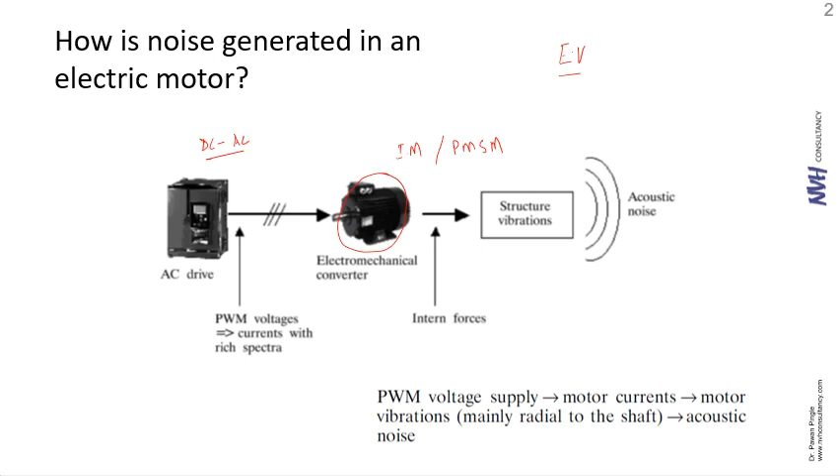Once the signal is converted to AC, it can be fed to the motor to drive it, and the motor will then drive all the components of your vehicle. Those will definitely have some kind of vibrations - these are called structural vibrations, which will then be converted to noise depending on their frequency. Also, there will be some frictional forces coming from the ground, like suspension and so on. So these are different types of noise that could be generated from a motor in case of EVs.

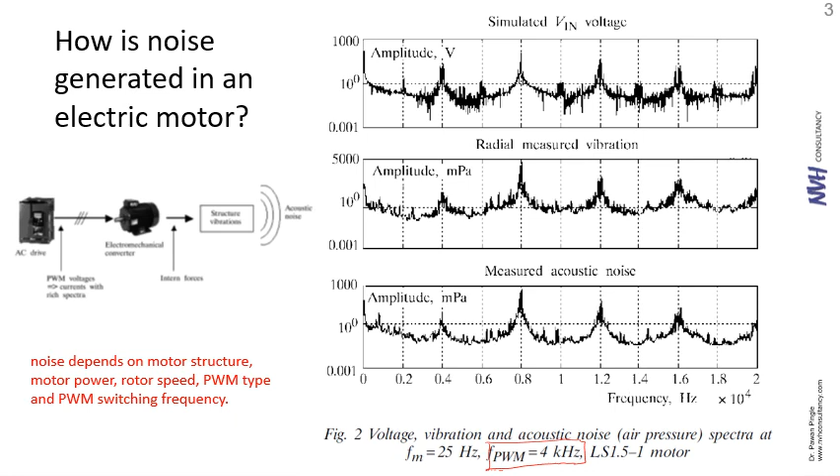If you notice here, we are mostly looking at FPWM, which is 4 kilohertz - this is the inverter switching frequency. We discussed briefly about PWM, that is the pulse width modulated inverter switching process that happens. In this case, it's a 4 kilohertz wave, and then you've got these side bands of 25 hertz on the spectra.

There are three types of noise that you can divide the entire spectrum into. One is the mechanical type - this constitutes bearing noise, for example. Then there is aerodynamic noise, which could be tire noise or wind noise. And then you have electromagnetic noise, which is the motor noise.

So when it comes to the mechanical noise or aerodynamic noise, it's very simple - it's dependent on the speed. So as the speed increases, you will definitely have a higher amount of mechanical noise, as well as a higher wind noise or aerodynamic noise.

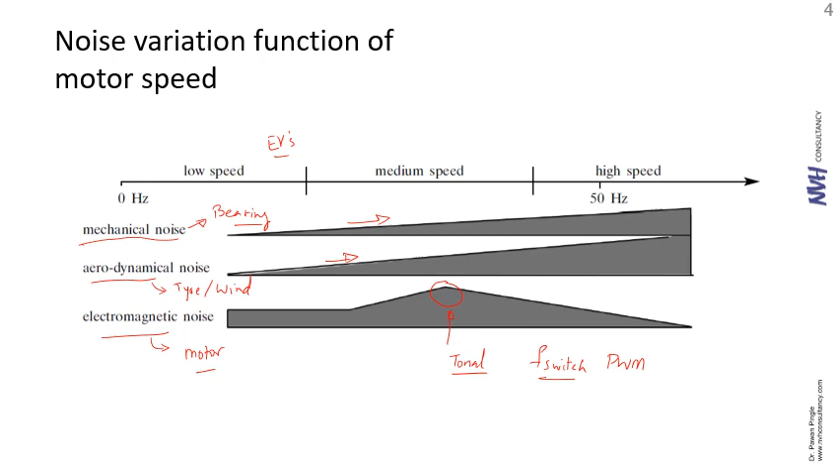So the contents of this presentation are taken basically from a lot of different areas - books, papers, online websites, and a lot of reading that I have done before this. So I've used a lot of material from SAE International. Then there's this company called EOMIS - they do a lot of stuff related to the EV NVH area, and I've used some of the concepts from their material.

Then there is also this set of journal papers or articles that are produced by Dr. David Lindstrom - so we are going to discuss a few of those from them. And then there will be mechanical design of electrical motors, as well as a few books that I have outlined over here. So you might want to check out these once this short presentation is done.

So what happens when you convert, when you are moving from an IC engine to an electric vehicle, from the NVH perspective we are talking about here - what do we really need to do as an NVH engineer or in the NVH field? What's going to be different when it comes to electric vehicles or hybrid electric vehicles?

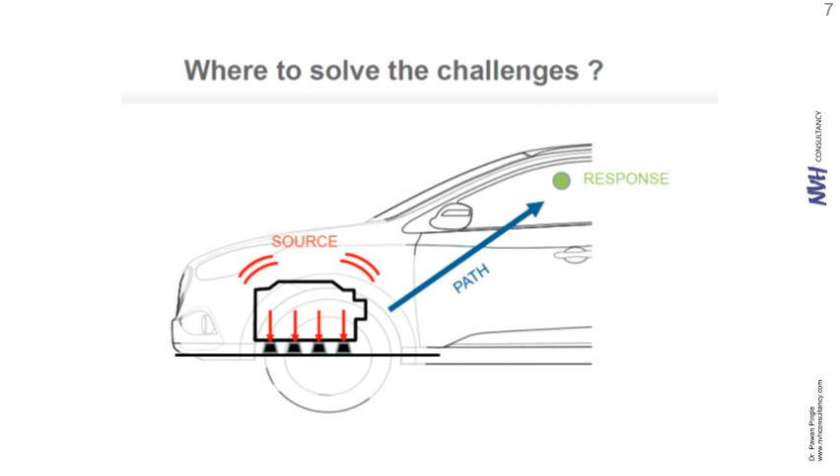So what's the challenge? The challenge here is that there is no IC engine, there will be an electric motor, and the motor noise, how it travels to the target, that is the inside of the cabin, is something that is going to be challenging to understand its path, so that if we can reduce the noise at the source or in its path, we can arrest the noise so that it doesn't travel all the way inside the cabin. That's going to be the challenge for us.

Basically, for the electric vehicles, the different areas or sources of noise could be divided into six different parts or regions. First is the electric powertrain, where the electric motor is placed. So in the electric powertrain you will see that there's an electric motor.

Now every vehicle has a different type of configuration of the motor. Some vehicles have four motors mounted, one at each wheel. Some vehicles have only one motor mounted. So it really depends on the configuration and the construction of the vehicle. However, the electric powertrain certainly is one of the most important noise sources that need to be looked at when it comes to NVH.

There are different accessories and components that we'll have to look at when it comes to NVH, as well as the chassis and panel vibrations, structural vibrations that come into the picture. Because now remember, there's no IC engine noise, so all these other noises are also very prominent and very important.

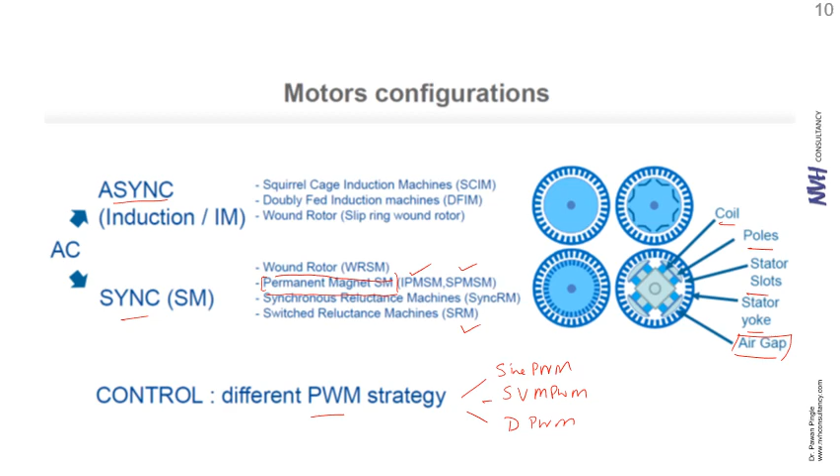So all this, along with that, there will be a control strategy, like we discussed, the different PWM strategies we are going to look at. There will be sine PWM or space vector type of PWM, and then also discontinuous PWM. So comparison of all this we're going to discuss in this presentation.

So we discussed this in brief - there will be motor, and there will be slot pole interaction. So what basically happens is this is the rotor and this is the stator. You will have these slots in the stator - this is the construction of the motor. So there will be a lot of slots out here. It could be any number of slots.

Again, the number is designed by the motor manufacturer - you can specify the number of slots that you want. So for example, you have got 48 slots, and then this is the rotor, which will house the magnets. And then there will be poles - so this is a 4-pole type of motor, or 2-pole pair type of motor.

And then based on the interaction between the permanent magnets and the stator slots, you will see that there will be some kind of force generated in the air gap. So there will be magnetic flux generated first, and because of the magnetic flux, the force will be generated. The magnetic force in the air gap will be directly proportional to the square of the magnetic flux - this is the electromagnetic equation that we will be using. From this force, we are going to find how this force affects different areas and parts of the motor, and what kind of stresses are generated.

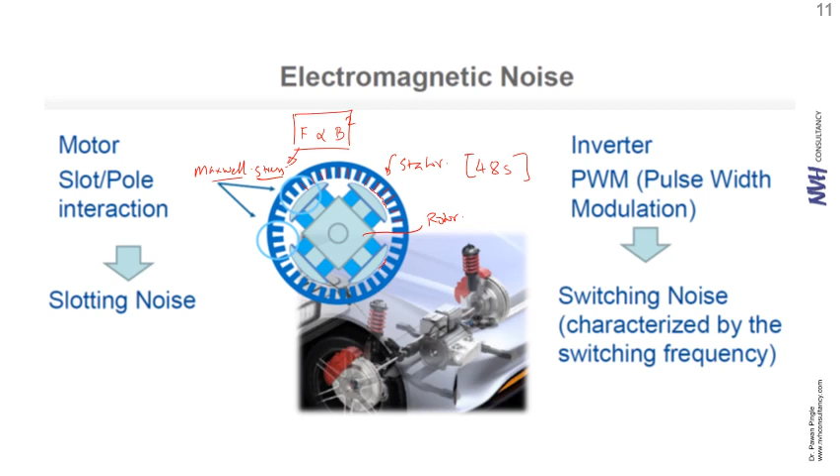Now, if you look at the spectrum plot of this, or the Campbell diagram, you will see that typically this type of noise will be having two parts: there will be slotting noise, and then there will be switching noise. The slotting noise has to do with the number of poles that you have, and the number of stator slots you have. Based on that, you will have the motor slotting noise.

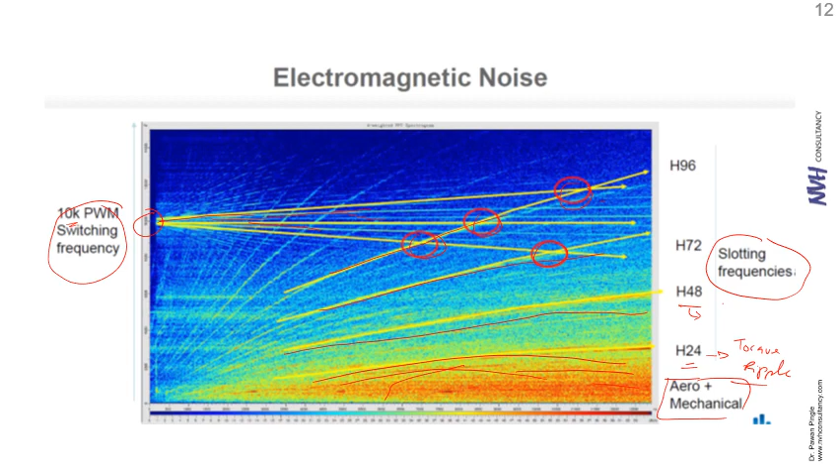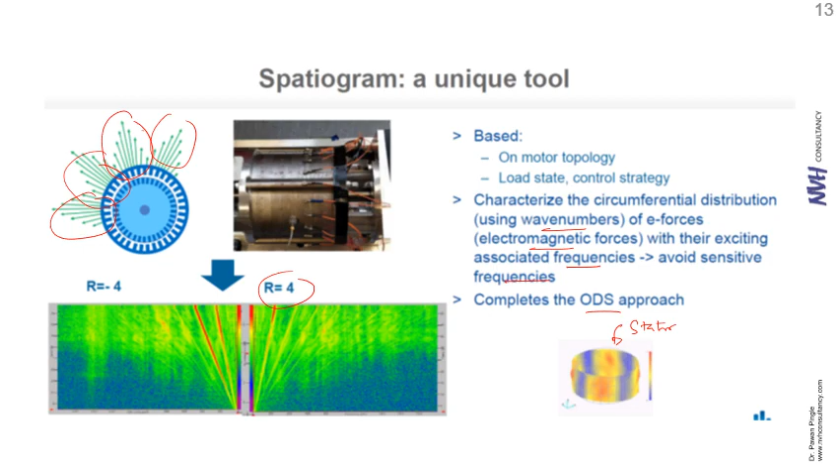There are many different ways to look at the noise, and we will discuss this again as to how you can understand the concept of wave number, electromagnetic forces, and the associated frequencies — what are the sensitive frequencies. We can also use the ODS approach. This is the ODS of the stator that is shown, how this ODS is affected at, let's say, wave number R equals to 4. What different types of forces are generated in the air gap of the motor, and how they are going to produce the noise — all these things we will be discussing in much greater detail.

How you can design for electric vehicles — what are the different types of sound design related principles that you need to employ. So those are some of the things that will need to be looked at.

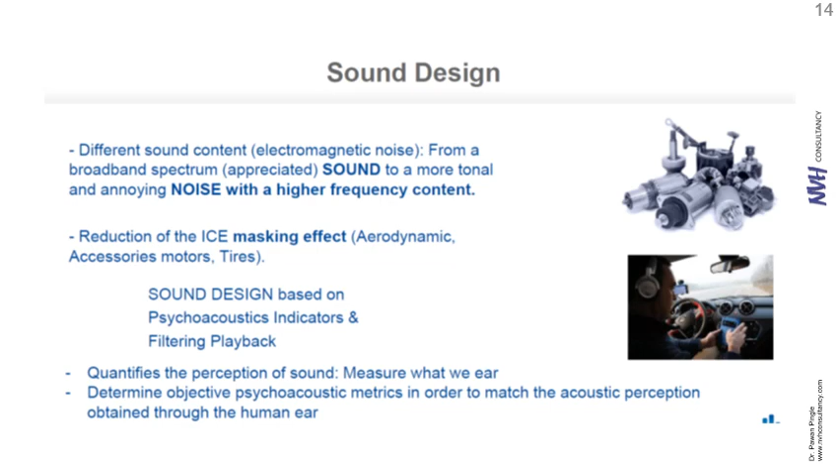We discussed this very briefly, that electromagnetic noise is tonal in nature. So the type of indicators or psychoacoustic indicators that we need to look at are the TNR, that is tone to noise ratio, and then there is the prominence ratio. These are the two most popularly used indicators.

Noise is definitely shifted to higher frequencies when it comes to electric motors. There is humming noise mostly for the lower frequencies. For the higher frequencies, you will hear the whining noise — these are the different orders, the whines that you can see over here. And then there's strong tonal content of the pole or slot effect — slotting and switching effect. These are the two effects that you will see when it comes to the electric motor.